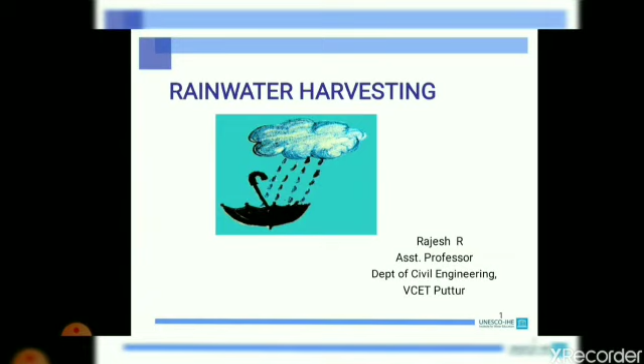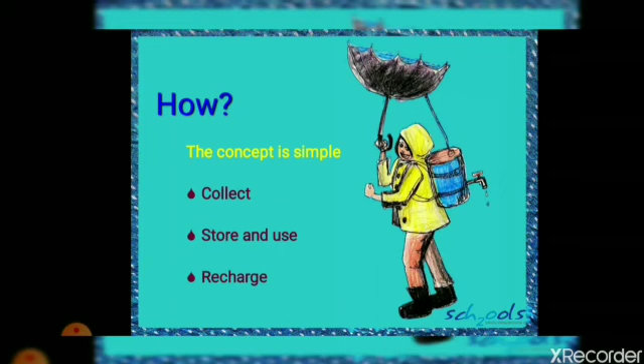Now, how can we do rainwater harvesting? Here you can see three simple concepts of rainwater harvesting. The first one is collect, store, use and recharge. In this small figure you can see it collecting the water, then storing it in a small tank, then using it, and after use, recharging.

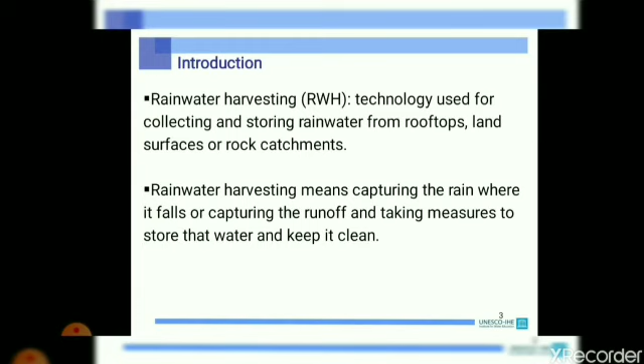So how do we define rainwater harvesting? It is a technology used for collecting and storing rainwater from rooftops, land surfaces or rock catchments. Or else you can say rainwater harvesting means capturing the rain where it falls, or capturing the runoff, and taking measures to store that water and keep it clean.

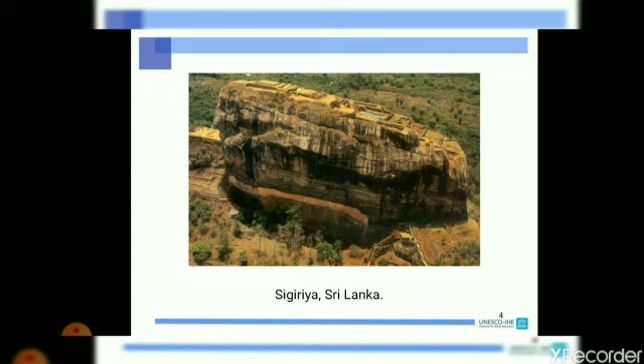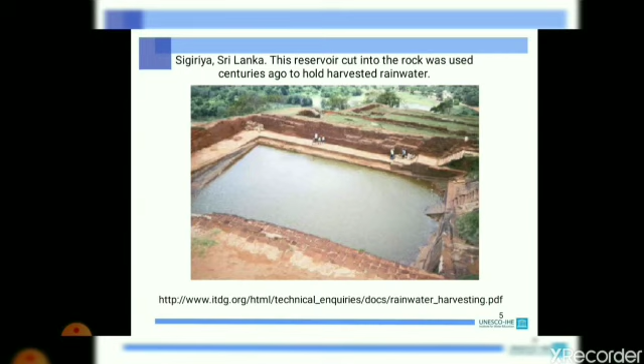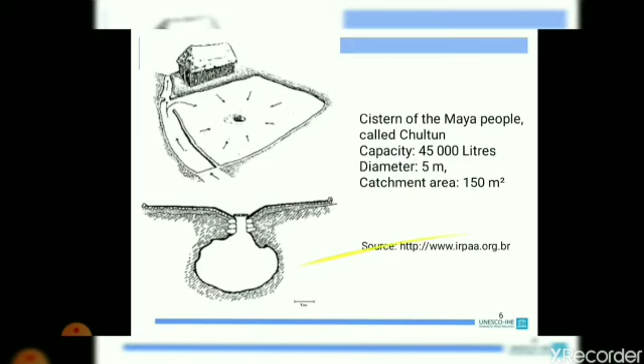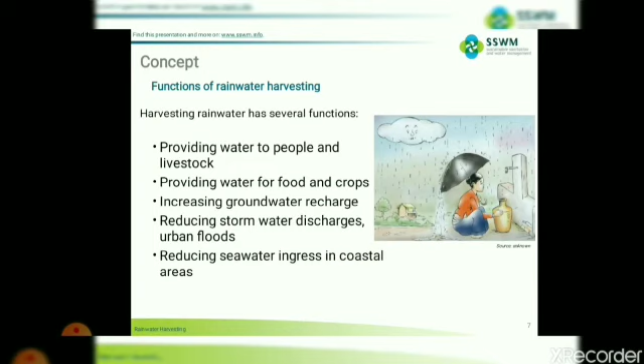Now we'll come to the concept of rainwater harvesting structures and their functions. It provides water to people and livestock, provides water for food and crops, increases groundwater recharge, reduces storm water discharge in urban floods, and reduces seawater ingress in coastal areas, controlling saltwater intrusion.

So these are the types of rainwater harvesting structures. The first one is roof catchments. This is very simple - a roof water collection system for households, a large system for educational institutes, stadiums, airports and other facilities, and also a roof water collection system for high-rise buildings, especially in urbanized areas.

Then one more is ground catchment - over a large area they collect the rainwater, and on one side in the corner they fix a collector or tank. Then we have rock catchments - natural impervious outcrops where rock is exposed; on top of that you construct a small pond or small reservoir, which then collects rainwater.

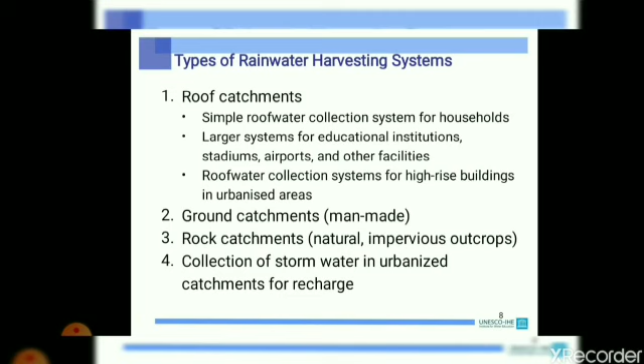Then we have collection of storm water in urbanized catchments for recharge. In urbanized areas at the time of the rain season they collect the water, where the storm water, the excess water, flows into small canals or small bunds, and that water is collected, then purified, then used. That is collection of storm water in urbanized catchments for recharge.

We'll come to the first one, roof catchment. It is very simple - collecting rainwater from the roofs. A domestic rainwater harvesting system consists of a collection surface, which requires a roof, and a storage tank where the collected water is stored, then guttering, or you can say channels, to transport the water from one place to another.

There are many varieties of guttering - some are PVC type material, some are asbestos material, and plastic polythene sheet is also there. These gutters are fixed at the bottom of roofs and collect the water. It also requires some other things like filters, flush systems, small equipment, and settling chambers, and these are actually parts of that system.

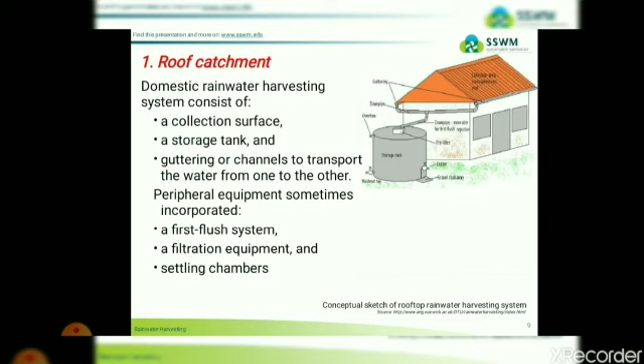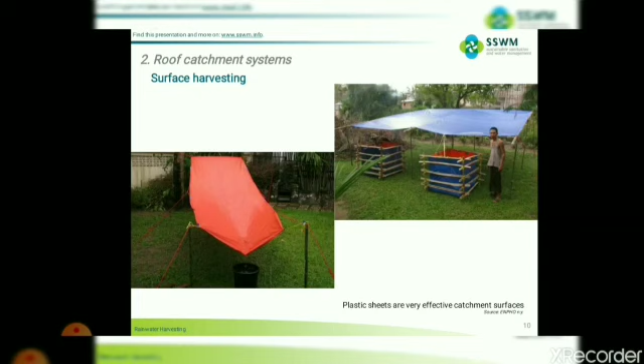Now we'll come to surface harvesting. Surface harvesting is for a small area where you collect rainwater using a polythene or plastic sheet over a large area, and collect the water on one side. When the rain comes, that's when you use this kind of system.

That is the roof catchment system by surface harvesting. These roof catchment systems require filters, tanks, a screen, and so on. Let's look at the first images.

After collecting the water in the gutters, initially you can see a small funnel, and at the top of the funnel you can see the screen, which is actually a mesh. Whatever debris is there in the initial rain or the surrounding area is filtered out by this screen.

One more thing: rainwater is not pure water, it is slightly acidic, with pH always less than 5.5. This water is collected by the funnel and then enters the collection tank. In the initial rain season, there is more debris in the water, so that water is first flushed out. This requires a small tank called the first flush separator.

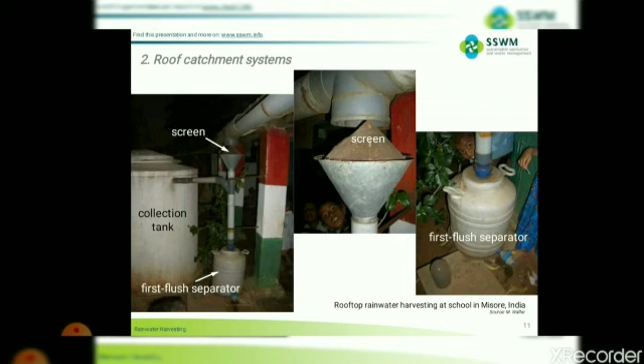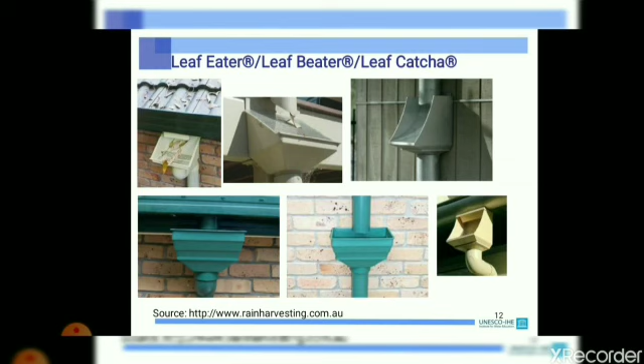This is the system, as shown in the second and third images. These are different types of guttering and their screen types - leaf eater, leaf beater, and Leaf Catcha. These are the materials used.

Now we'll come to ground catchment. Ground catchment requires a very large area. You make a slope on one side, fix a tank there, fix a screen mesh and small filter bags, and then collect the water. That is the ground catchment system.

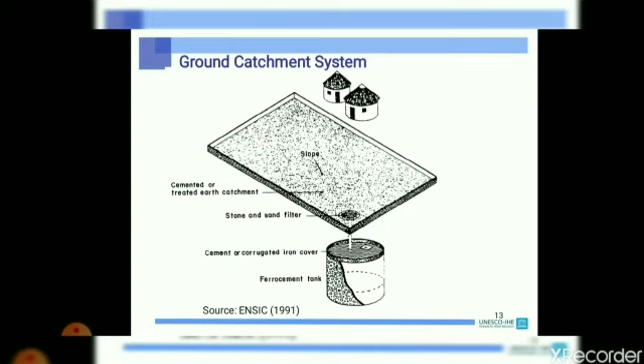Another rock catchment system is found on top of hills, maybe in the valleys. Across the valley you construct a small bund. When the rain comes, the water collects on that bund. That water is used for agriculture, sanitation - this is the rock catchment surface.

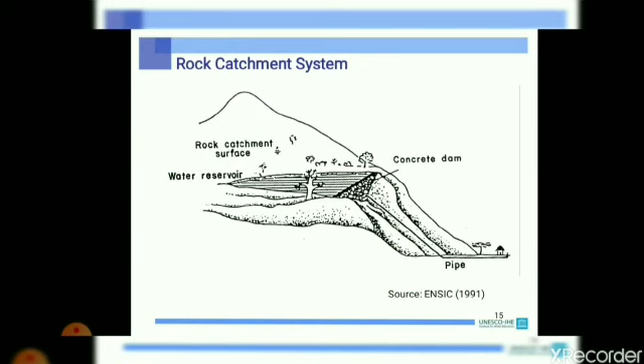It reduces the flow of water in the hills. At fixed distances you make trenches. These trenches reduce the flow of surface water and are good for recharging groundwater - they reduce the surface flow of water.

Contour trenches trap rainwater, enabling it to percolate into the underground aquifer and break the speed of fast-moving water.

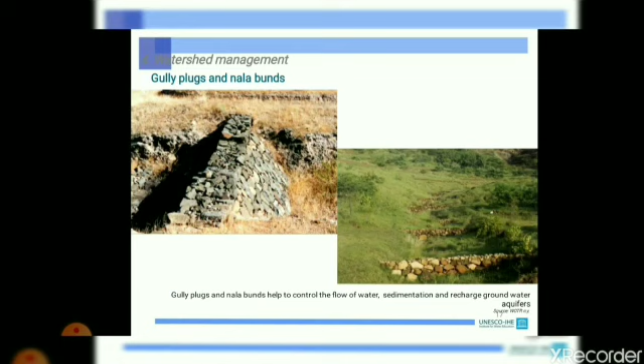This is usually found in mountain tops where the rills flow into gullies. Across these gullies or small streams, you construct small bunds using boulders, but they don't control all the water - some of it flows through, reducing the flow of water. That is gully plugs and nala bunds, very common in the Western Ghats.

And this is check dams and percolation tanks. Usually the source of water here is rain.

At the time of rainwater, it is reducing the flow of water and collecting it, and that water is used for agriculture, especially in our area. This is a very common rainwater harvesting structure in our area.

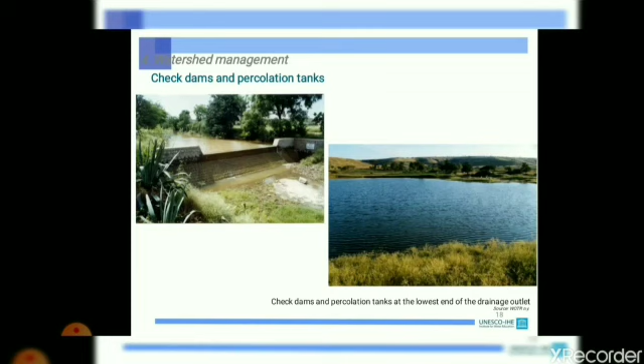Now we'll come to use of harvested water, where you can use those harvested waters, especially in urban areas. You can use them for gardening, flushing, washing clothes and cars. Of course, you can use it for potable purposes also, but you should ensure the quality.

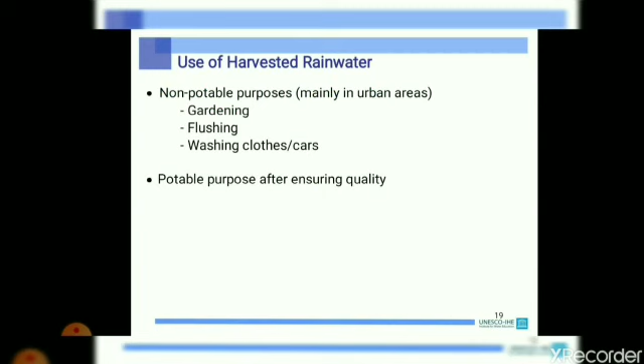Once the water is collected and you go for quality purposes, you can go for filters, good quality filters. Then check the water quality parameters, then you can use it for potable purposes.

Especially rainwater harvesting in urban areas, in view of increasing migration to urban areas and the emergence of mega cities in the next millennium, it is imperative that the water supply system should be evolved to serve such development. Installation of rainwater harvesting systems is mandatory for construction of buildings in some towns in India, especially Bangalore, Cochin and Mumbai.

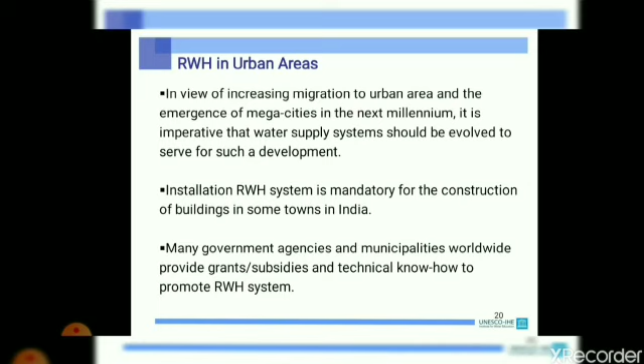If you are constructing a house, the government has a strict order - you should show a small rainwater structure or roof water collected by a small pit. So that is what makes it a mandatory system for construction of buildings in some towns in India. Many government agencies and municipalities worldwide provide grants, subsidies, and technical know-how to promote rainwater harvesting systems.

Examples of typical options in urban areas: rainwater use in households as a supplement, public institutions, high-rise buildings in high-density urban areas, collection of rainwater in industrial areas, use of runoff in airports, collection of rainfall from public open spaces.

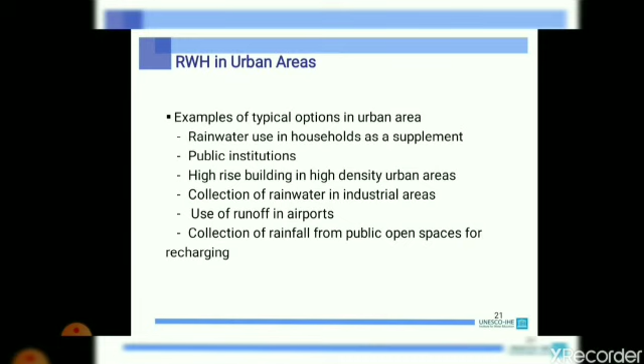For recharging, we will come to urban areas and rural areas - how we can implement rainwater harvesting structures and what structures we can implement in rural as well as urban areas.

In urban areas, rooftop rainwater runoff harvesting is done through a recharge pit - a small pit you construct for recharging. This is common and nowadays it is practiced - the recharging pit. Recharging trenches, which go a little bit in depth.

Then tube well recharge, where there is a borehole point. Surrounding that, at a certain diameter, you excavate the soil, then refill with silt, sand, boulders, then make a small filter set, then supply the rainwater to that pit and it recharges. So that is tube well recharge.

Then we have recharge wells, directly connected to an open well - recharge wells.

Now we'll come to rural areas. What structures can we implement in rural areas? One is a gully plug - in the gullies you make a small bund using boulders. Then contour bunding - on the hill you make a contour bund.

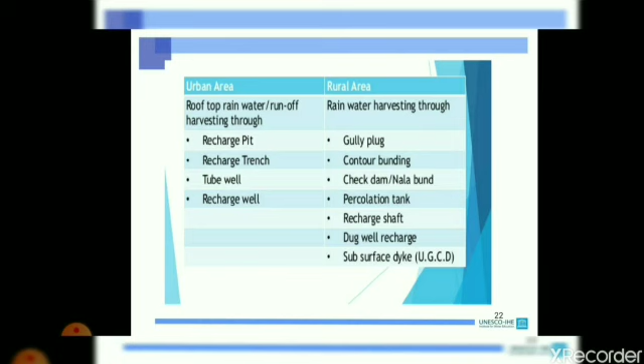So what are the advantages of rainwater harvesting in urban areas? One, flood control is greatly improved by reducing urban runoff. If you are constructing small check dams and so on, it is good for controlling floods.

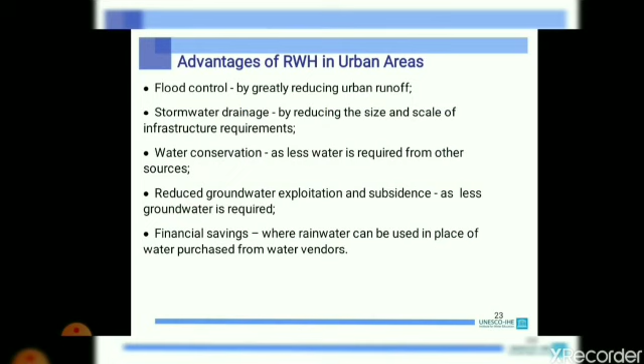Stormwater drainage benefits by reducing the size and scale of infrastructure requirements. Water conservation, as less water is required from other sources. Reduced groundwater exploitation and subsidence, as less groundwater is required. Financial savings, where rainwater can be used in place of water purchased from water vendors.

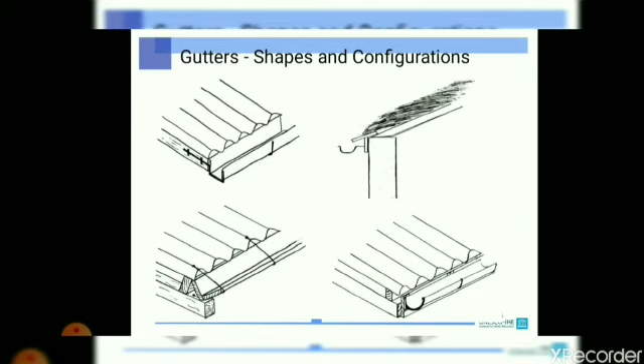How you decide which gutter is required depends on how much water it is collecting in your gutters and what the area is. Based on that, you select what configuration is required.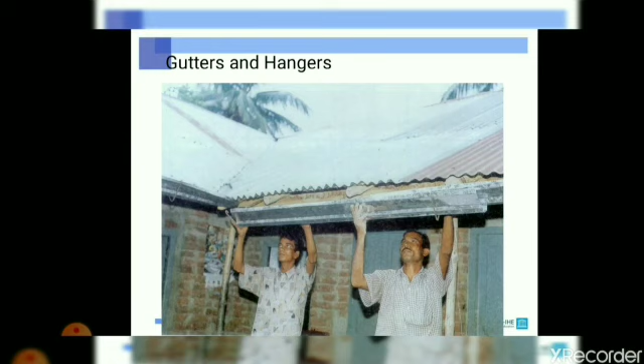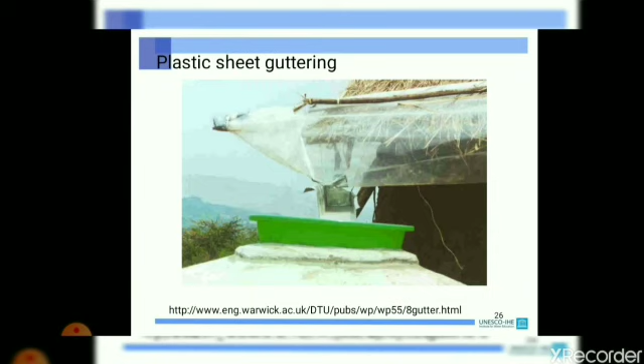Now, this is a very simple technique - grass tops collected by a plastic sheet connected with a small tank. This is actually practiced in rural areas, I can say. So this is all about rainwater harvesting structures - a very important topic. Thank you.